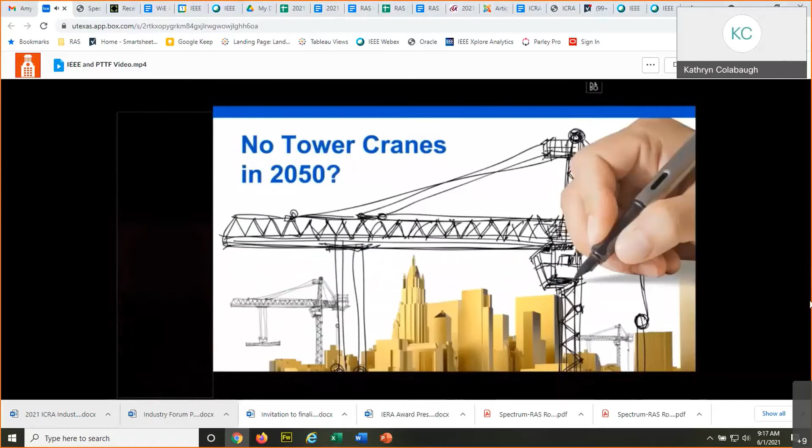We were given a challenge as a team to imagine a project site where cranes don't exist. It's a fantastic challenge. We're tasked to evaluate either non-crane technology solutions or modifications using a few enablers that we'll walk through today with you.

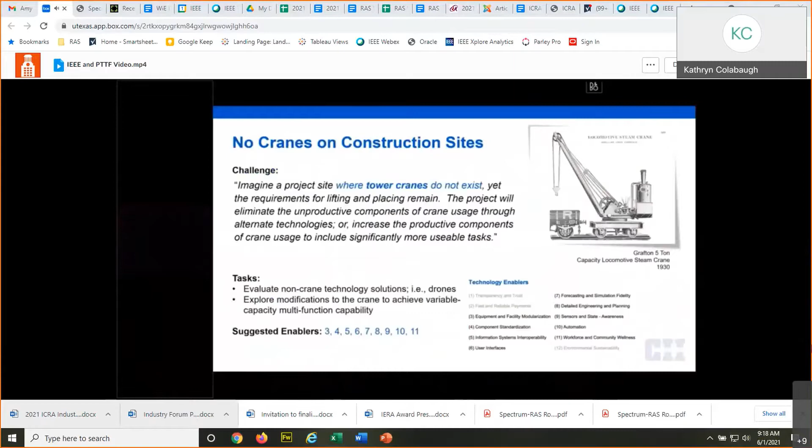Our team has two employees from Zachry, Todd Sutton and Ajay. You heard them earlier on the call, please say hello. Hey, good morning. Good morning. And then we have Abdullah Al-Suhaibani from UT Austin. Good morning, everyone. And from Bechtel, Jennifer Monreal, and myself, Misha Nikulin.

Very excited to be here with you.

As a team, we came up with a vision for our challenge task to accelerate solutions that will potentially eliminate tower cranes on site. You can read this vision vertically in blue, and you can also see the full version of that vision.

So with that, I would like to ask Todd to talk next about some of our brainstorming session results and details. Thank you, Misha. So during our brainstorming for the path to the future for no tower cranes 2050, we came up with different categories like flying things, robotics, and then also new materials and additive material manufacturing.

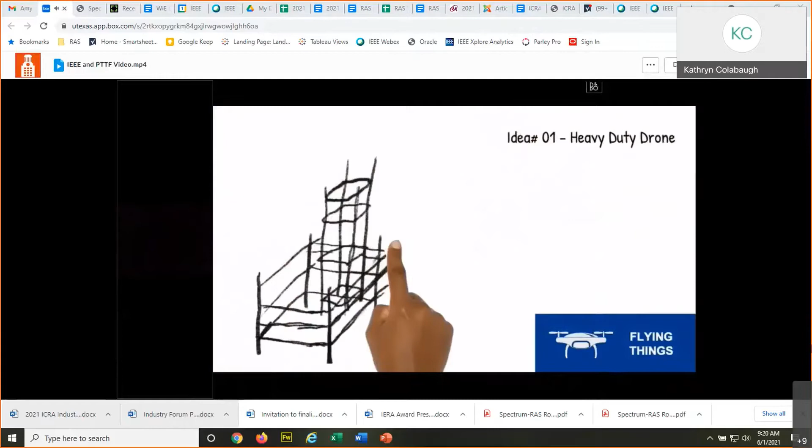Emerging technologies and crazy ideas for year 2050 plus. Let's take a look now how we're working to eliminate tower cranes with these ideas. Idea 1, heavy duty lift drone for placing materials instead of cranes. Here's an example of Griff Aviation's Griff 135.

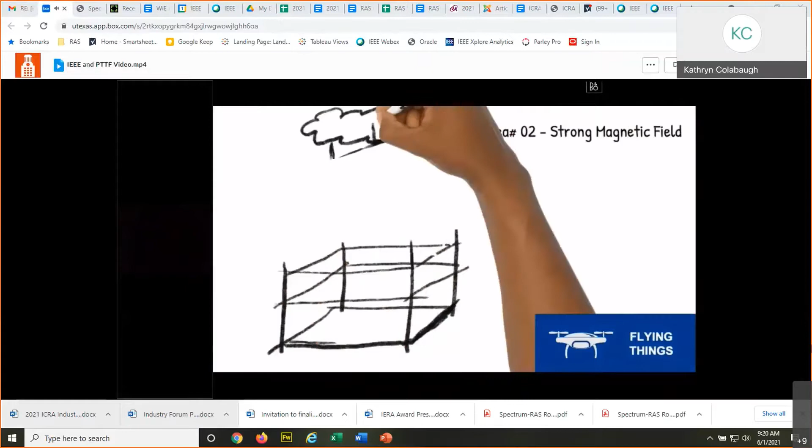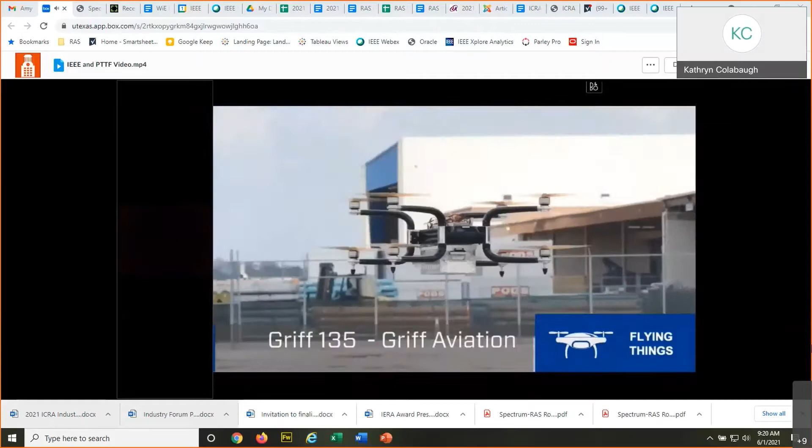Idea 2, strong magnetic field for also placing materials in a different way. Here again is a 300-pound toolbox being lifted with the magnetic from Griff Aviation.

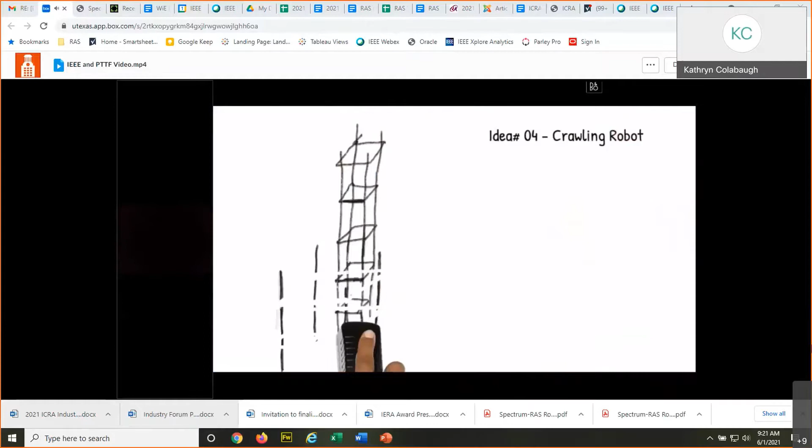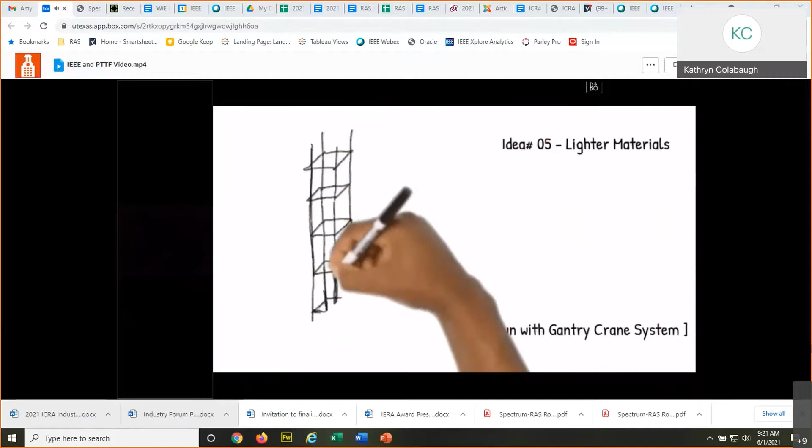Idea 4, crawling robot that can vertically and horizontally crawl on the structure to place materials. And then idea 5, lighter materials. This is shown with a gantry crane system that can also have vertical and horizontal movement across the structure for placing materials.

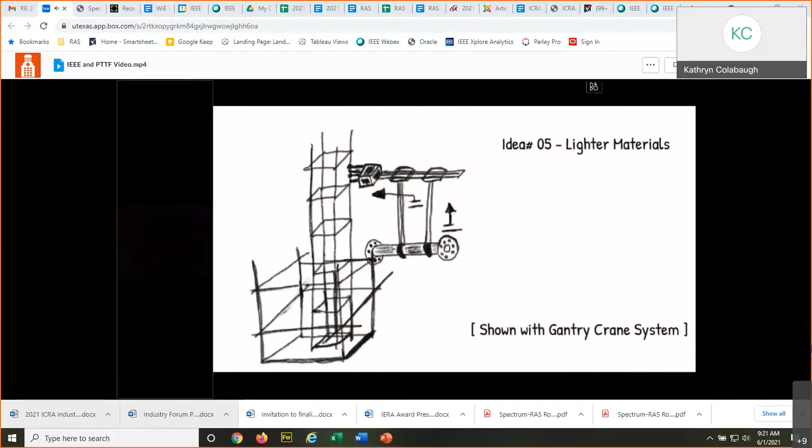And so looking at some other materials like biomaterials or plant-based materials. Here, bio-based is growing concrete bricks from bioorganisms. We have idea number 6, no gravity bubble tents.

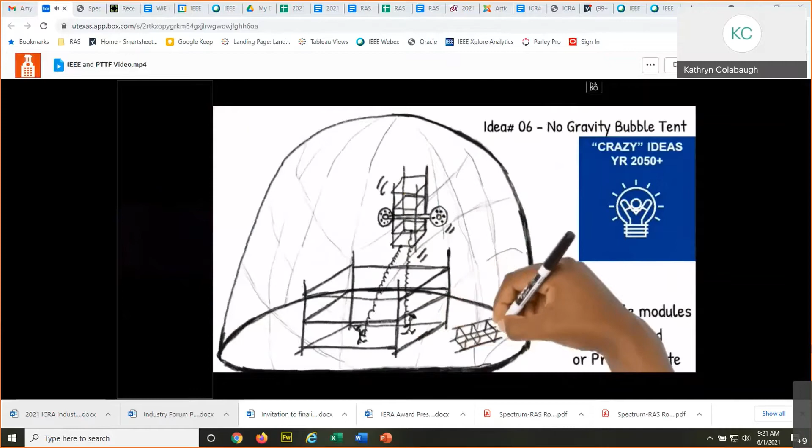This is a crazy idea for year 2050 and beyond. We're looking at being able to have modules that are prefabricated, sent to the job site, installed, and also prefabricated sub-assemblies. This is an emerging technology, the Skypicker, a very small crane that can be used as needed on the project.

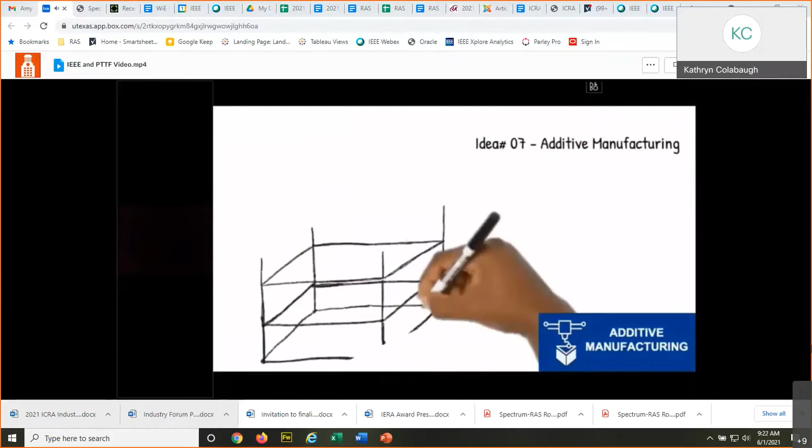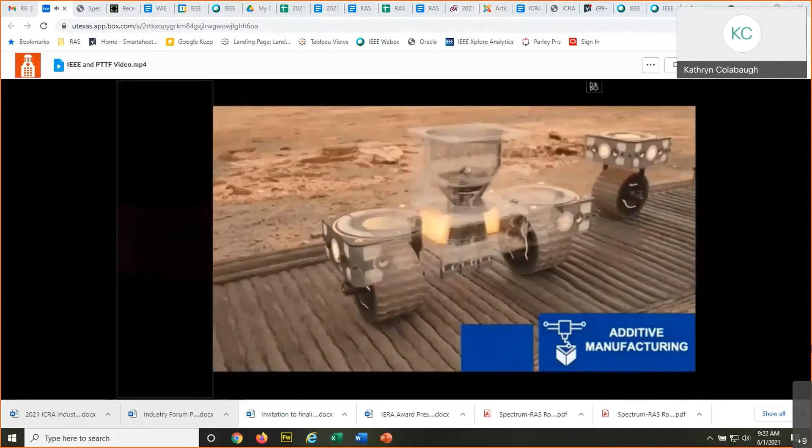Idea number 7, additive manufacturing. This is looking at a 3D printed foam platform. Here's an example from the Hassell plus EOC NASA Mars Habitat submission.

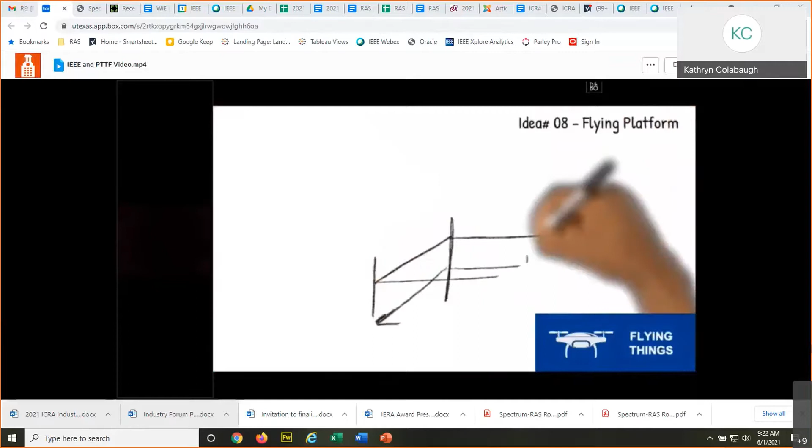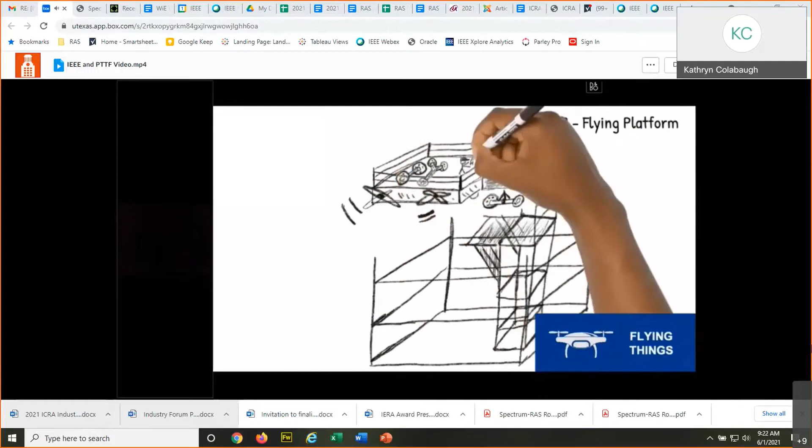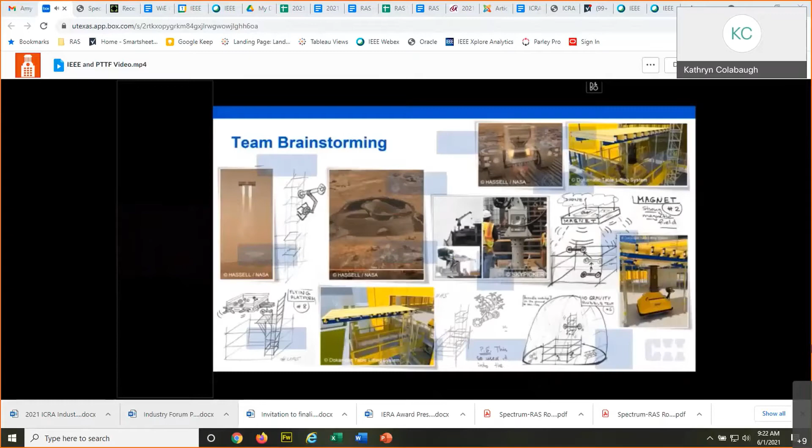Idea number 8, flying platforms. This is used for placing materials with the operator on the platform with the material. Here also another example from Hassell, EOC, NASA Mars Habitat submission. So with that, we looked at all our brainstorming ideas and the different categories that we had put in place. Now I will turn it over to Jennifer.

Yeah, so once we started with our brainstorming, taking a step back, we took a look at everything and we divided it, as Todd was saying, into various subgroupings. So this slide highlights some of the items that we had identified.

So flying things, looking at drones, flying platforms, magnets, sorts. Next section is robotics, so either a crawling robot or an elevator platform, sliding robot. New materials, similar to what Todd was saying, bioengineering, lighter building materials in general, additive manufacturing, so 3D printed structures, temporary and permanent structures.

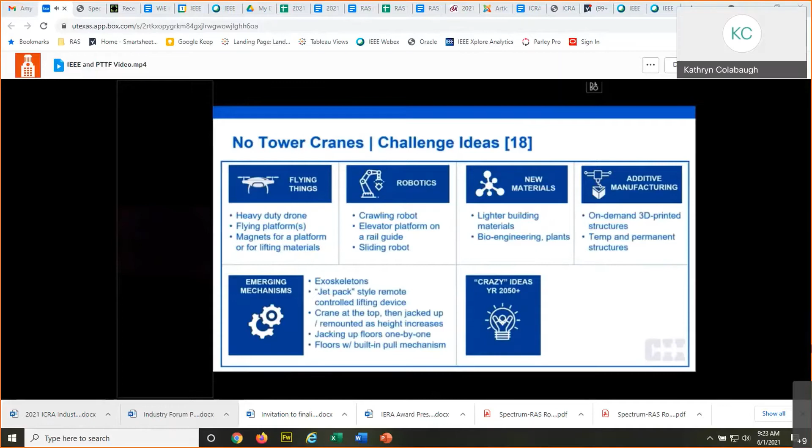And then emerging mechanisms. A lot of these are kind of in process today, they just may not be where they need to be. So exoskeletons, jetpacks, style lifting devices, a jacking crane from the top, jacking floors themselves, and then the crazy ideas. Todd mentioned a few of these in the video: no gravity bubble tent, digging underground instead of building vertical, and then using artificial intelligence to utilize the tower cranes better.

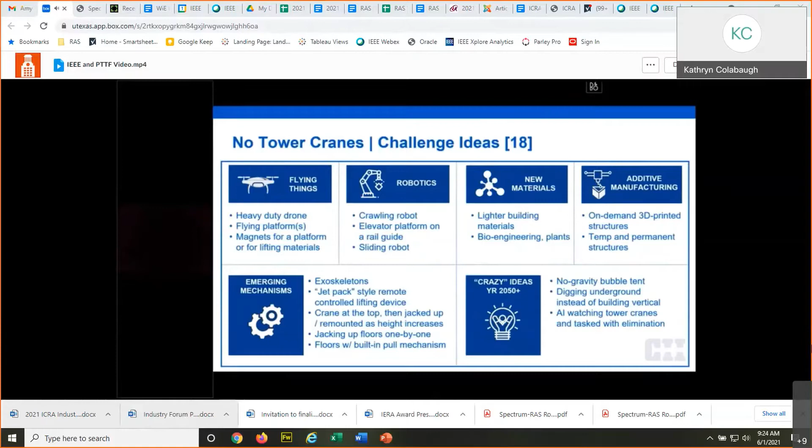Yes. So based on our brainstorming sessions and identifying our enablers, we identified three different milestones to get to our vision of no cranes on a construction site.

So enabler number 3, which is the equipment and facility modularization. If we look at a 5-year horizon, we would ideally like to explore more modularization, augment with other pre-existing technologies like drones or whatever's available right now.

If you look at a 10-year horizon, we can look at bringing a manufacturing approach into the construction industry, explore concepts that are employed in the manufacturing industry to leverage construction and overall minimize crane costs. We can also look at concepts like biomimicry, look at nature, how problems are solved in nature. We can also explore ancient construction techniques to solve problems right now related to cranes.

Thank you, Jennifer. So this was a summary of all of the enablers. As you can imagine, we have detailed slides for each enabler with more information, and they will be available for the presentation. We'll now conclude our presentation with suggesting a new challenge for the next set of teams. Jennifer?

Yeah, so as we were going through the enablers, brainstorming and discussing amongst the team, one item that continuously came up is how do we safely and productively integrate robotics and emerging technologies into the industry, while also ensuring that required regulations are aligned to advanced design and construction.

Todd had mentioned that the sky picker shown in the video has actually been developed, and the company tried to implement it in the field, but it was shot down because it didn't fit with the current regulations and standards. Nobody knew how to address it, nobody knew how to ensure that it's safe, nobody knew where it fit in today's construction industry.

And that is going to be one of the biggest challenges we're talking about going forward. It's not developing the technology, it's seeing how it fits into an industry which is already considered unsafe by all means. So it's one of the challenges we saw as a good opportunity for another brainstorming session.

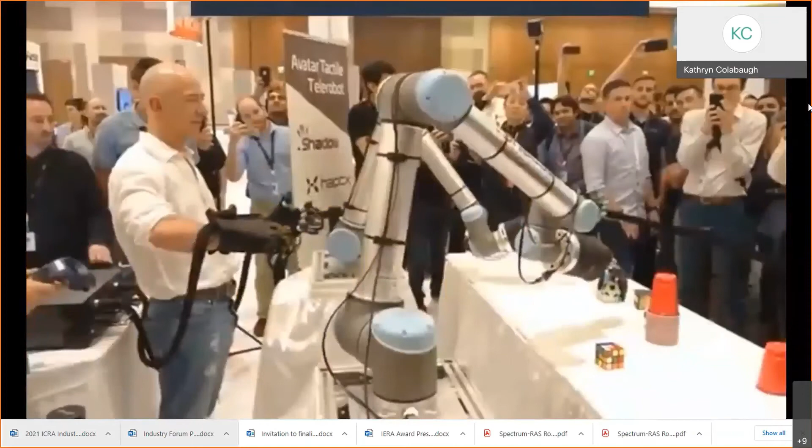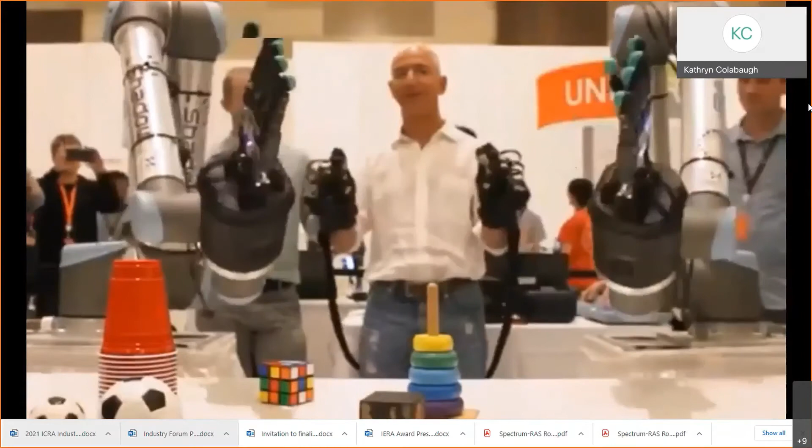So our first vision is kind of beyond the singularity, which means when AI and machines meet and then surpass the capabilities of humans. So this is everything from selection, design, fabrication, construction, to operation, conceived and executed by these machines and AI.

The benefits of this is that it's by and large probably the most cost-effective solution, if an AI is able to manage the entirety of a construction project from start to finish. And it reduces human interaction by having them do only the most complex operations that a machine may or may not be able to perform.

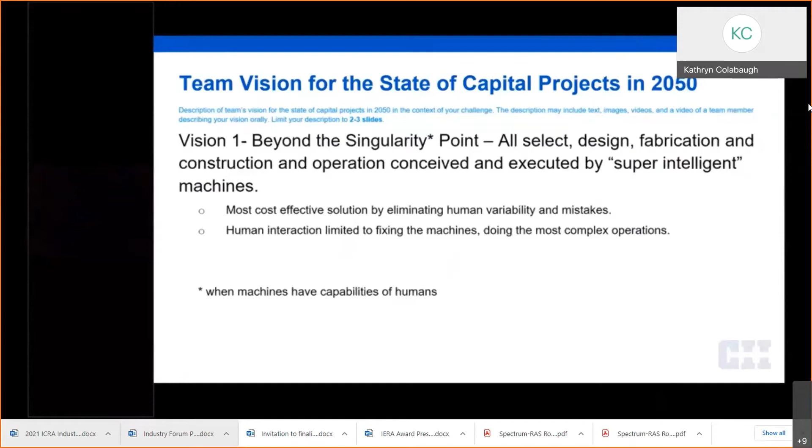So Bill, if you want to explain. You want me to take the next one? Yeah, I see on slide 4. So we also have an alternate vision, and it's not a world where everything is done by machines, but a world where humans interact and control machines.

There are two forces which could propel this vision. One is complex and changing conditions, where programming and designing machines for all the variations is really inefficient. The second reason is societal change: governments may impose minimum employment requirements to avoid social breakdown when no one has jobs or income. So in this world, people would operate machines remotely.

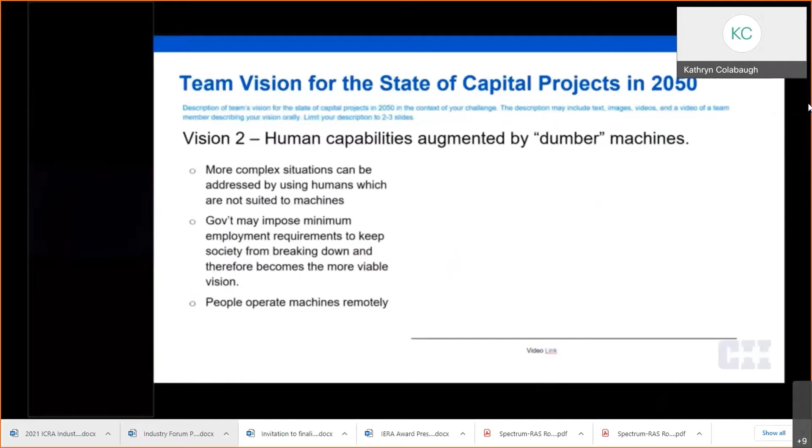The video that's here, I guess we won't be able to show.

When it links up with the rest of its pals, things get a little more interesting. The microbots are controlled with this neurotransmitter. I think what I want them to do, they do it. Applications of this tech are limitless. Construction: what used to take teams of people working by hand for months or years can now be accomplished by one person.

So we see the path to no workers as taking two trajectories. The one for no workers is foreseen, but there's going to be a societal change before it's realized. And the second vision is where there are workers, but they're remote from the work face, and I'm not so sure what the societal change will mean. So we have these two visions.

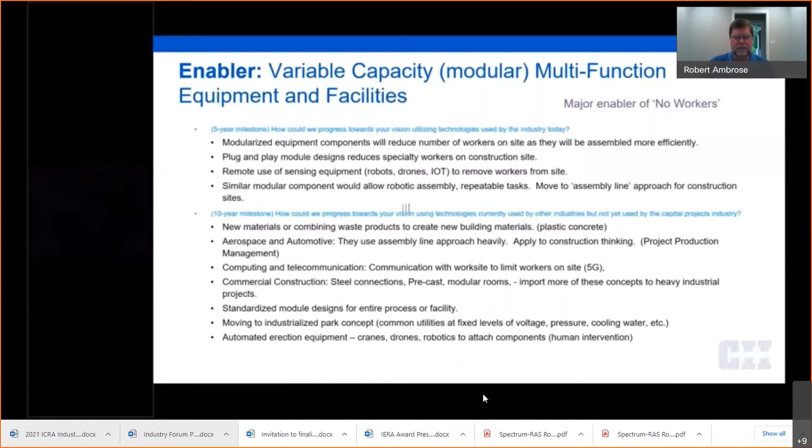So Robert, I'm not hearing any audio. Sorry about that, I don't know what's the matter with the video. Hold on one second.

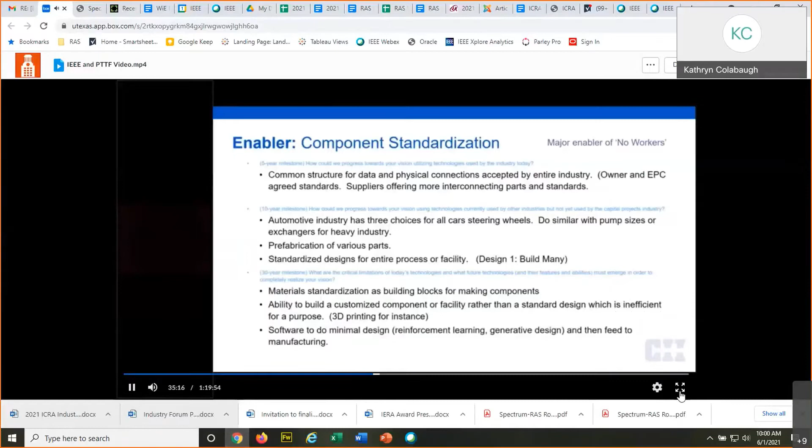And you can standardize the design process for the entire facility. The philosophy is design one, build many. And into the 30-year milestone, again, there's this material standardizing the materials as kind of the building blocks for making all of these components. You can build a customized component or facility rather than a standard design, which is inefficient, but you could use 3D printing for that purpose.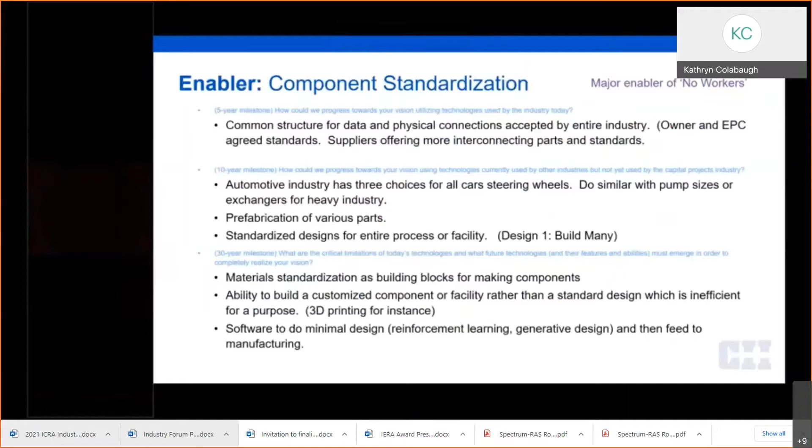And then software, which would be minimal design, and then feed that into the manufacturing. So Bill, we have moved on to the next slide.

Okay, slide 10, integrated information. So we see integrated information as a major enabler of fewer workers. In the short term, sensors can reduce the maintenance personnel by predicting failure and allowing intervention before failures. Augmented reality can contribute to fewer workers by working more quickly and accurately.

In the medium term, sensors will allow better designs against failure, leading to fewer maintenance people. In other words, if you know where the failures are occurring, you'll just beef up your design there, and you won't have as many failures, so you don't need as much maintenance.

In the future, sensors may become integrated with materials, helping to maintain them. Think about concrete or steel that would change color based on stress, for instance, and then you could help maintain operations, or maybe you could feed back into the operations. If there was high computing power, maybe the weather and environmental conditions can be predicted, so you can have more productive work along the way. So we think that's a major enabler.

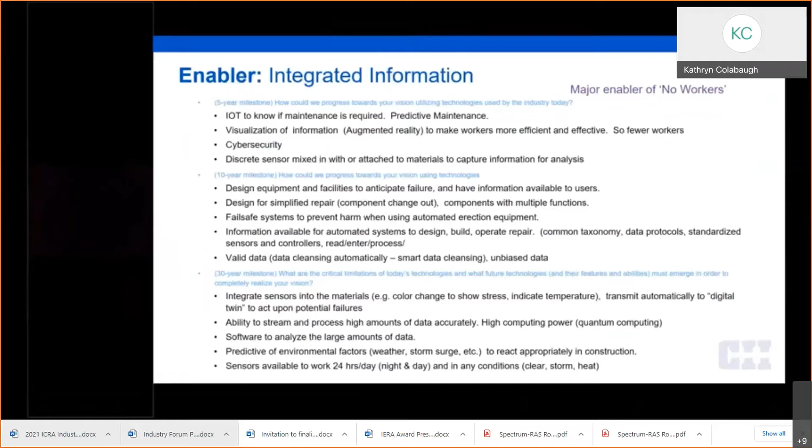Next slide on human equipment computer interaction. So I was going to say, you saw in the opening video with Jeff Bezos that telerobotics is on the next horizon. That was you put a glove on and you can manipulate a robot, but you can also get sensors feeding back information to your hand to say how heavily you're squeezing it or how heavy it is.

If computer-aided design will result in fewer designers, I'm already seeing that when I go to some of the EPC contractors. The robots, well, we weren't able to show some of those videos, but the robots can now handle non-symmetrical materials, boxes that are different sizes and shapes, picking up things like bolts versus nuts. So those are already progressing.

3D concrete printing is on the near horizon. I've seen some applications in the commercial world, commercial business, to show that you can do 3D printing of concrete. No reason why we can't do that on the sites. It'll start to eliminate some of our form workers and rebar workers.

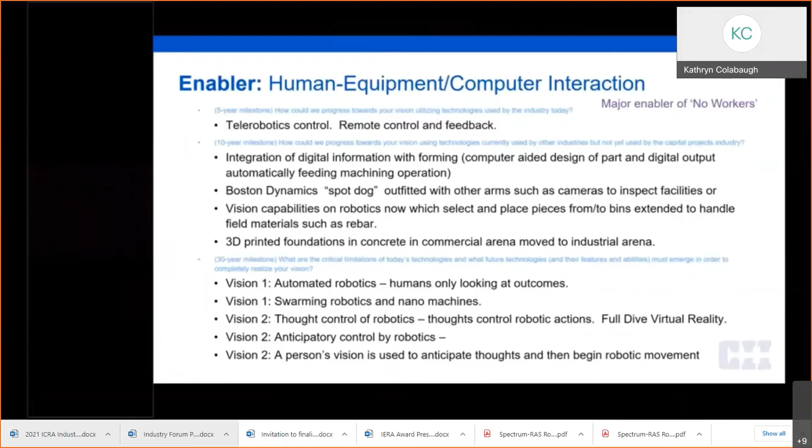Okay, slide 13: forecasting and simulation fidelity. We didn't see this as the major enabler of no workers. The digital twin may reduce the workers on site for operations, but we didn't see it as much of a contributor for construction workers.

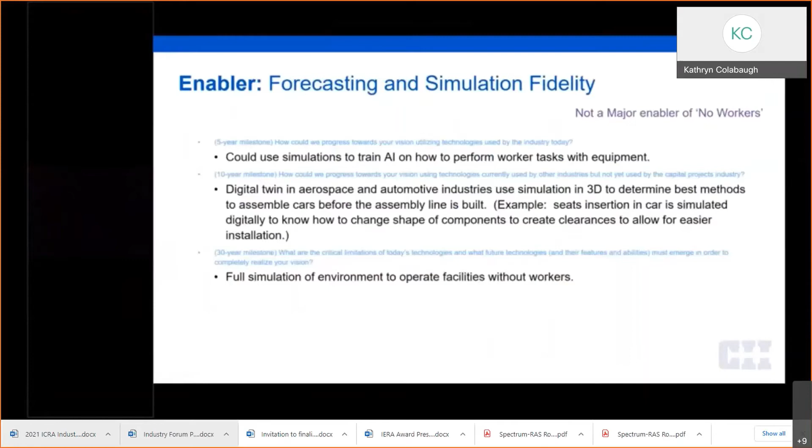Corey, I think you've got the next one on microplanning. This enabler is microplanning, and we consider this not a major enabler of the no workers vision. In our 5-year milestone, we could see greater computing power allowing for a greater number of components to be simulated for the assembly, more detailed instructions for workers, increased productivity, and leading to fewer workers.

You can plan your model based on work processes rather than scheduling. This allows the mathematical optimization of schedule, resources, and cash spending.

Then Bill may want to elaborate on this, but project production management applies operations science to heavy industry. Bill, I don't know if you want to speak to that a little bit.

Yeah, it's another application of operations science, coming out of California, Stanford, similar to Alice Solutions, where you lay out the work process, put your resources on each step of the process, and then start to optimize for schedule, inventory control, and cash spend. It's done mathematically versus what we do now, which is kind of a hand situation with P6 and some of the other software tools.

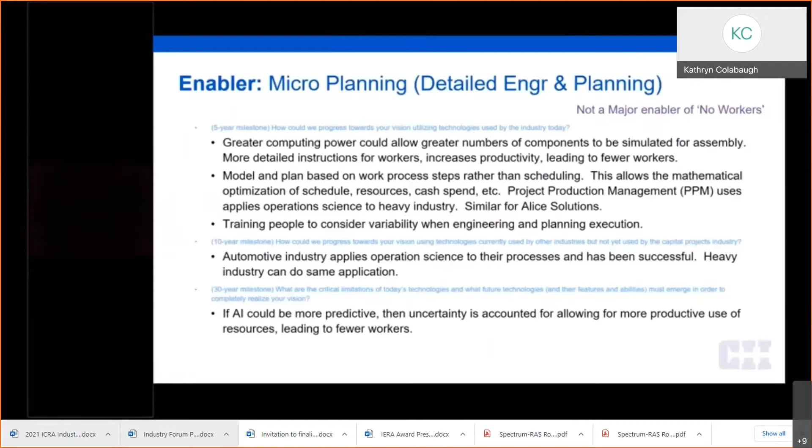Our next slide is on state awareness. We also consider this not a major enabler of no workers. This is just knowledge of the status of the engineering, of the material, which phase of construction it's going through, through the use of sensors and different work processes, which lessens the variability of the work processes and provides more productive use of those resources.

Then next is having that information be available to AI for predictive maintenance, so getting to a state where instead of scheduling maintenance, we can get to predictive maintenance to use those resources in a more productive manner.

There's an example where you have a lot of sensors in an aircraft engine. So you know if something is going wrong because the sensors provide that data.

In our 30-year milestone, we may be able to have sensors provide accurate data enough that we don't have to do predictive maintenance, but can have that sensor provide information as a just-in-time maintenance thought process.

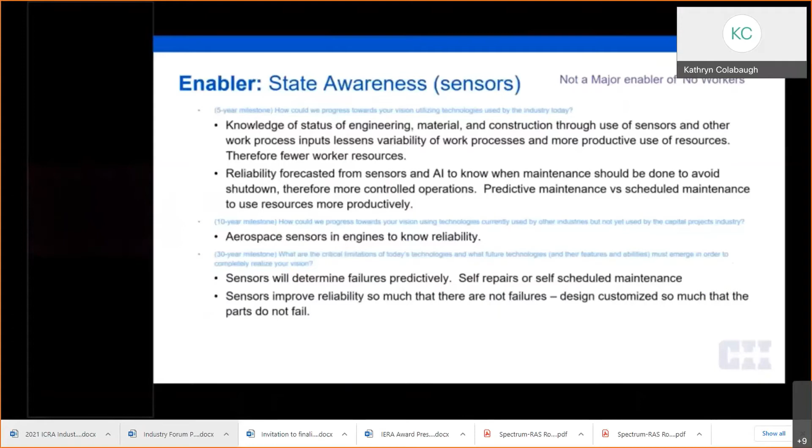The next one is workforce health and intellectual engagement. We divided this into two sections. For vision one, the AI singularity, we didn't think this was necessarily a major enabler of no workers. But for vision two, we did think it was a major enabler, having humans augment more dumb machines. If there are no humans involved with the process, then there is no workforce. That's what we went through with vision one.

With vision two, there's training for a lot of people on how to interact with machines and AI, to optimize tools and become more familiar with AR, VR, and robotics, because that is going to be the eventual direction of this industry. Having people more familiar with it allows them to integrate with the industry easier, and allows people to take the time to teach creativity rather than rote learning, to enable that innovation in the future.

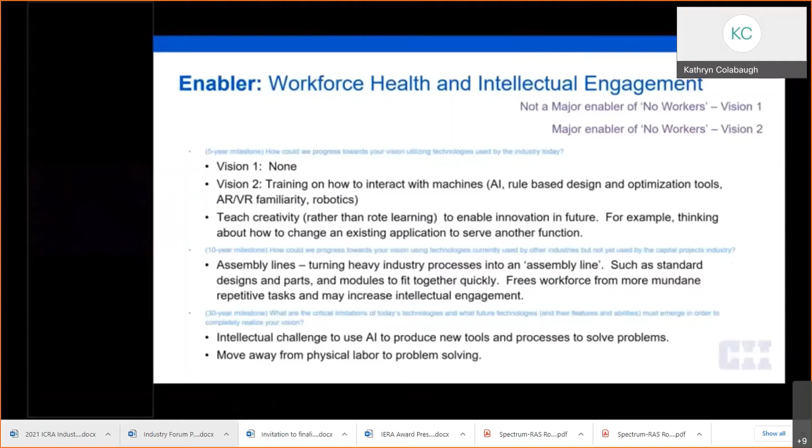And Bill, we've hit the next slide.

So as you can imagine, automation in design, construction, and operations would be a major enabler for no workers. Rule-based design for engineering is here now, and wider application will happen quickly, reducing the number of designers.

We can add more variables into consideration for more efficiency in our construction processes—take care of construction congestion, optimize the use of cranes, those types of activities. In the future, the AI can do overall optimization between design, procurement, and construction to optimize the entire process of building the plant.

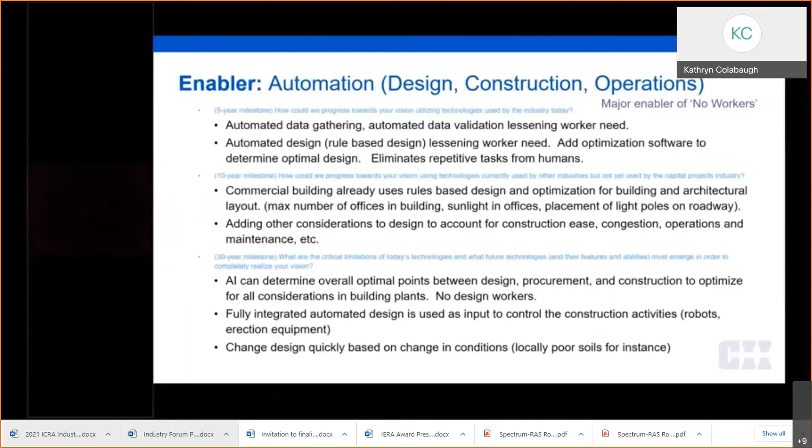In the future, we can also get design integrated with robotics, so the design can actually control the work done on the construction site. There was a video where a designer was telling the machine, oh, make this longer, change the color of that, and the machine would actually do the design in conjunction with the creativity of the human mind.

The last enabler we wanted to talk about was environmental sustainability. We didn't find that environmental sustainability was a major enabler of no workers. What we did find is it will have a major impact on the workers. For instance, the types of projects may change. Infrastructure projects for water, environmental control, carbon capture, transportation, waste recycling may dominate in the world. And projects with a heavy environmental footprint would likely diminish, or maybe you would create those projects on a much smaller basis closer to the source with 3D printing and so forth.

So it's not a major enabler, but it will impact the skills that the workers have and how the plants are built—with less movement of soils or wetlands, how big they are on the footprint, maybe co-locating energy generation with the plants, and handling waste or recycling products at the same time you're making new products.

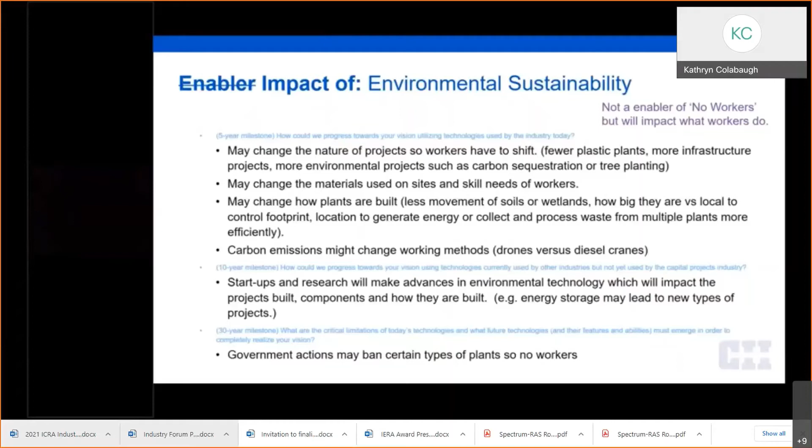Questions are: how do you share the benefits of projects? When nobody earns a salary, none of the benefits of the project get shared. And then the question is, well, if nobody has any money, why do you need the project? So how do you keep society from breaking down between the haves and the have-nots?

You're starting to see some of that now with the 99% protests. Maybe you could even say in some of the political dysfunction that we have now in our country.

And then you have this question of how do you provide stimulation of personal self-worth and satisfaction and challenge. A lot of people get that from their work, which then leads to another question: how do we transform from a consumer world to another value system in order for the world to be sustainable? Would it be a more intellectual world of personal well-being and spiritual value, or serving others? Will we be using automation to blunt the environmental impacts? And how does this actually come about in our thinking and our desire to have it come about?

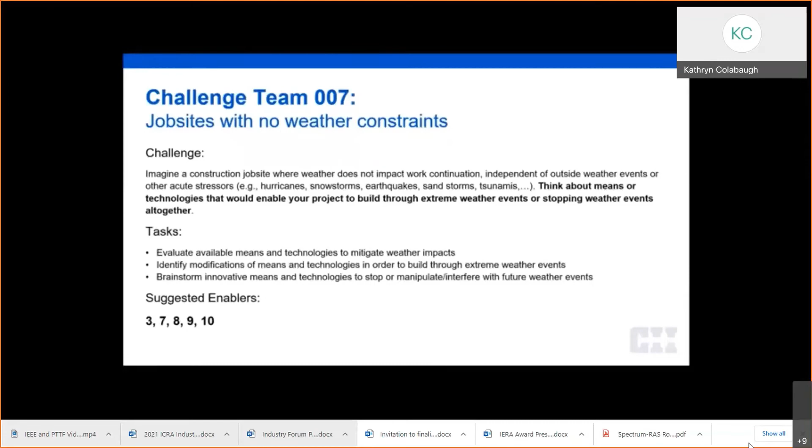As a team, we identified a few tasks: to evaluate the available means, methods, and technologies to mitigate weather impacts; to identify modifications of these methods or technologies to build through extreme weather events; and then to brainstorm innovative ways, 30 years out from today, where some of these means or technologies may be that could help stop or manipulate future weather events. We identified 5 enablers that we felt were focused on this challenge. We'll go through those here in a second.

The reason I joined this team was because I thought it was kind of a crazy challenge, stop weather events. I mean, how are we going to control the weather? You see here a picture from The Simpsons where they put a dome over the city, and we're going to have to put a dome over our construction sites. Or 30 years from now, we're going to have some genetically modified mutants that can control the weather, like Storm and X-Men. I'll open it up to the team to add some of their thoughts on this particular challenge.

Yeah, I would agree with you, Cody. There's a lot of cool ideas that we came up with at first. One of them, and I don't know how many of you guys are Disney Channel fans, but there's a movie called The Ultimate Christmas Present. Santa happens to drop this little robot as he's leaving a house, and this robot gets picked up by one of the children living in the house, and it controls the weather. So it can make it snow, it can make it sunny, all that good stuff. That was what I immediately thought, and what a cool way to control the weather that way. But those are my thoughts.

Thank you, Ariana. Jose, any thoughts to add? No, just echoing what you said, Cody. Definitely a crazy challenge, because when you think about it, there's no way a human can control the weather or the sun or moon or anything like that. So I think it required us to really think outside of the box, and even some of our crazy ideas were like, well, maybe we can find a way to make that work. It was definitely something that was a lot of fun to be a part of, and really try to think out of the box and see what we could come up with. Thanks.

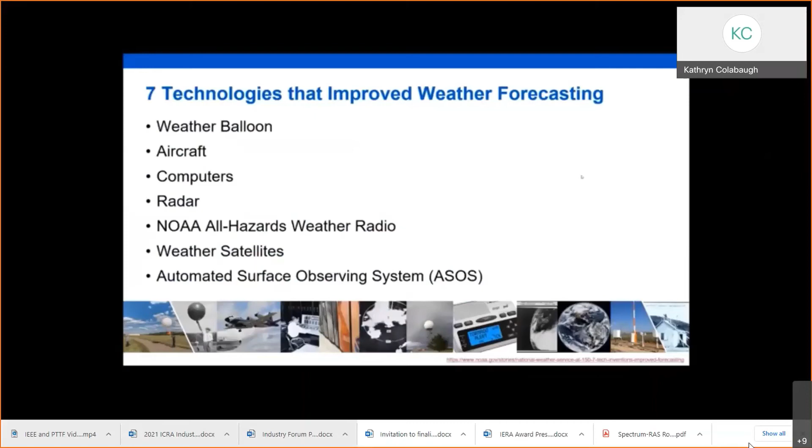Based on our understanding of how we brainstormed, and some of the older technologies and history of meteorology, we came up with a team vision focused mostly on three facets: how do we better predict weather, how do we weatherproof construction sites or materials so construction can take place in a climate controlled environment, how do we reduce on-site construction durations due to rain, snow, or hurricanes, and how do we reduce the number of humans required on site, specifically for things like installing a window system in a snowstorm. The whole goal is to reduce weather related risk and improve productivity through investment, creation, and adoption of weather prediction and weatherproofing technologies for capital projects.

I'll walk through a couple of enablers here. The first one is Enabler 8: detailed engineering and planning. We thought this was really important to reduce that risk Ariana mentioned. We need to reduce the amount of time spent constructing on site, exposed to the elements, which means reducing the time it takes to install on site, reducing the number of things installed on site, and moving a lot of the construction indoors to a climate controlled environment.

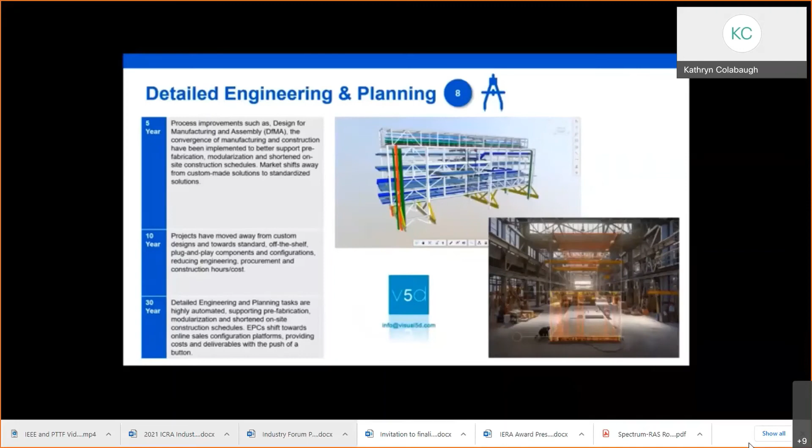And kind of more online sales configurators, right? You go online, you can configure your Tesla and have it delivered to your house, for example. I think we as an industry need to move more towards that direction and have more configurable solutions versus these custom and bespoke solutions. Again, these are going to help drive that more manufacturing-like mentality when it comes to construction, allowing us to move these activities indoors where the weather is controlled and we have more control over our environment.

So from a 5-year perspective, we really need projects and contractors and owners to adopt the best practices that have been identified by CII into their project incentives, goals, and processes. Incentives drive behavior, and so we need to make sure that these best practices find their way into how we're executing our projects and into things like contracts, for example. But again, design with the end in mind. You need to very early on determine this type of construction so that detailed engineering and planning can follow suit and design appropriately.

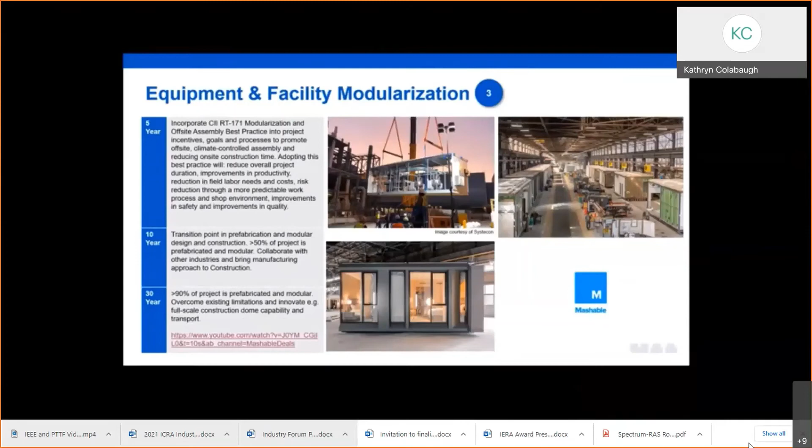And I'll hand it over to Lisa on this one.